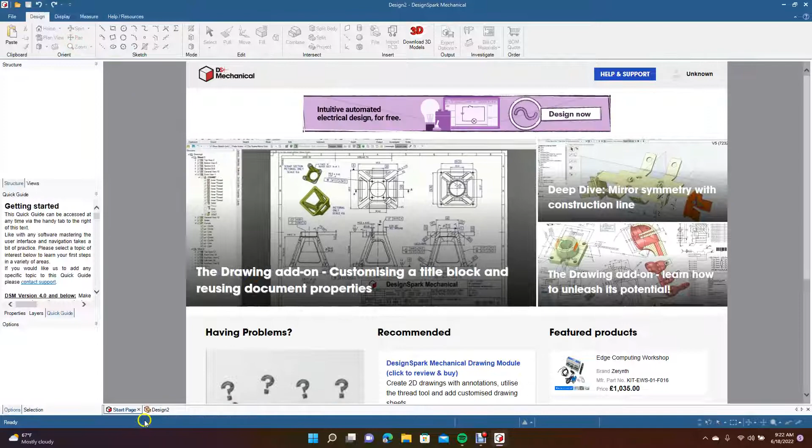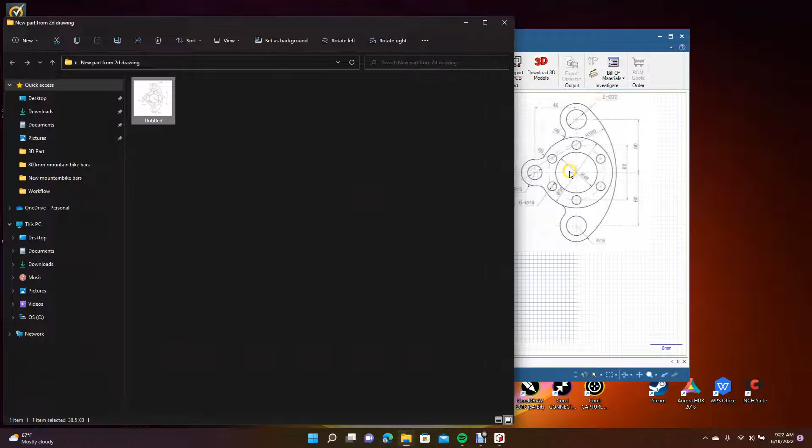Today I'm going to be doing a DesignSpark Mechanical tutorial, and we're going to be creating a 3D part from a 2D drawing. So we'll go ahead and open up DesignSpark. This particular part is in millimeters, so we'll go File, New Design, and create a plan view. We'll go up to File, DesignSpark Options, navigate to units and make sure that's in millimeters, and it looks like it is, so we'll go OK.

I found this drawing on the internet and thought it looked like an interesting part, so we're going to recreate it. We'll close that and go to full size on the file. This we're just going to use as a reference, so it just has to be big enough for us to see it. Hold down your shift key if you're going to scale something.

The first thing I'm going to do is put out some construction lines. This one here, from here to here, midpoint is 60, and then there's another 60. So we're going to do a construction line and turn on our snaps. We're going to create 120, so let's type in 120.

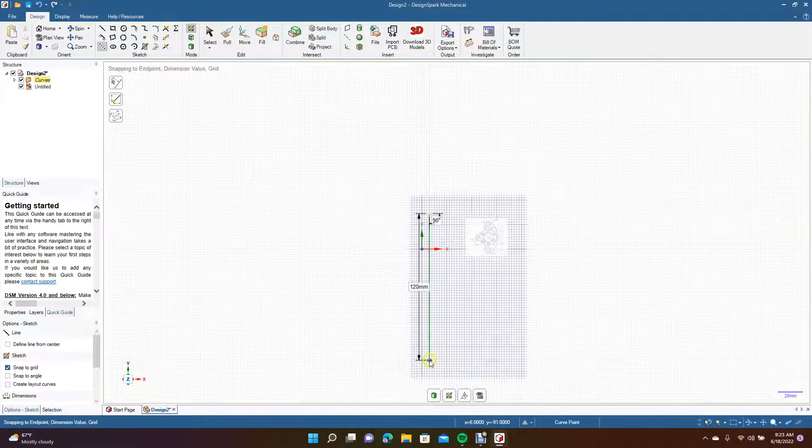Now we can blow up this 2D drawing here, this is going to be our reference. Let's go Control Plus. We're going to put in our first circle here, on the end there. It looks like 22.

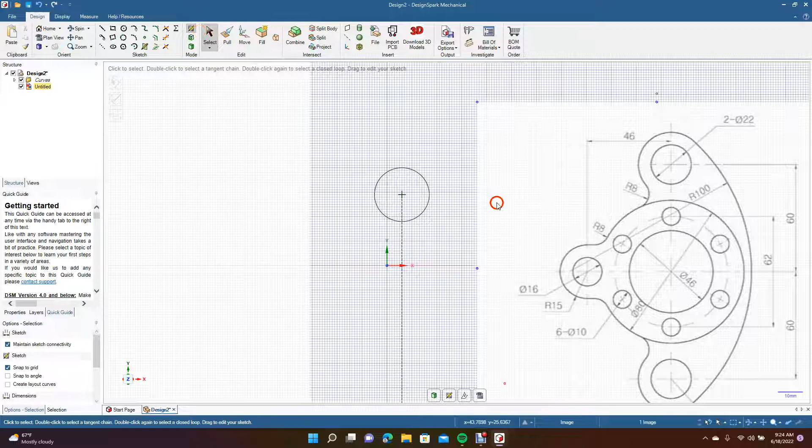Let's zoom, click on the graphic, pull that up a little bit. Looks like this is 18, so that would be, let's go here. That's going to be 10, 20, 28, it's going to be 36. So go ahead and do your second circle at 36.

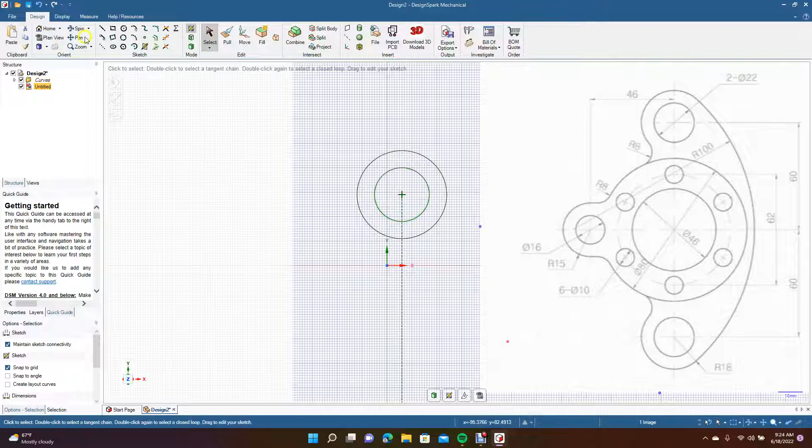So you have this one and then this one. Now you're going to pan up a little bit, Control minus. Now you're going to do the same down here with these holes, 22 and 36. Okay, now you have this hole here, and this hole down here.

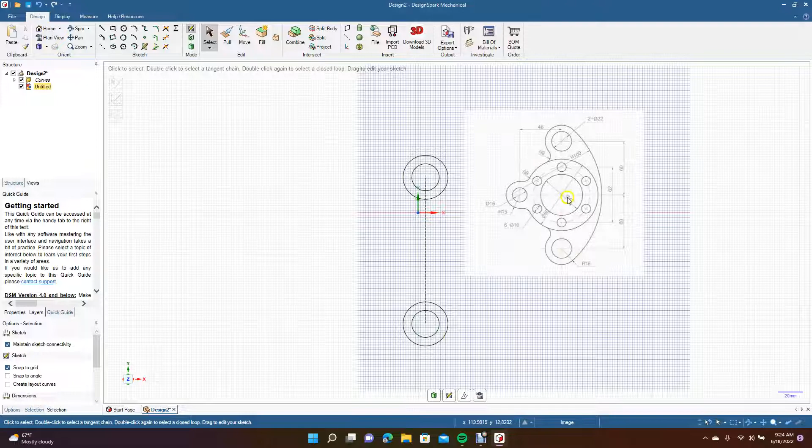Now you're going to do the mid hole in the middle here, so we'll do Control Plus, and find the center of this construction line. It looks like it's right there, make sure that it is the center. This needs to be 46, and the outer one looks like it's 80, so we'll punch in 80 there.

Okay, so now we have all this stuff here. Now we're going to do these little circles here. It looks like this is 46, this is 80. I can't really tell where the radius of this line is, it's just somewhere in the middle there, between here and here.

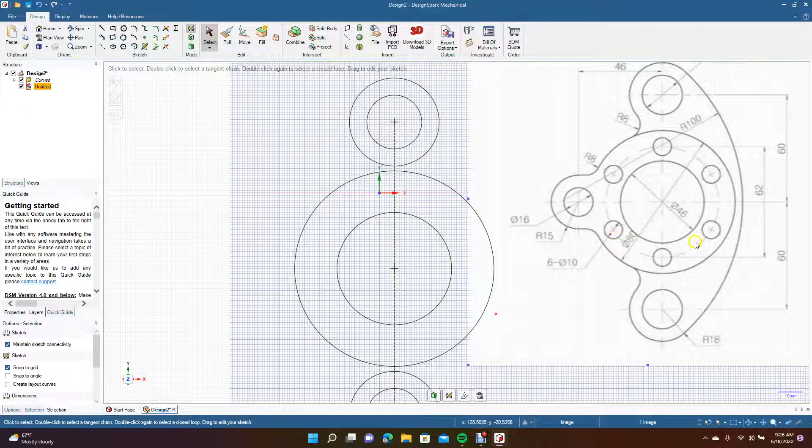Let me move this around, see if I can find that measurement. It's 46, this is 80. I don't really see that measurement at all, unless I'm looking at it and I can't see it. Well, let's just go ahead and do somewhere in the middle, so we'll click here. Somewhere in the middle is probably going to be like right there, possibly.

Okay, we'll just go 63, since it isn't identified on the drawing. I don't see it anywhere unless I'm looking right at it and missing all this. Okay, we'll just keep it that way.

We know that these circles here are 10, so let's get our circle tool out and just draw one of them at 10. Now we're going to replicate, we need a total of 6 of these. So we'll click on that circle there.

Come up to our move tool, come down here to create pattern, make sure that's checked, and we're going to drag that to the center. Then we're going to turn this, and we need, on the count, 1, 2, 3, 4, 5, 6. We need 6 of these, so let's go 6.

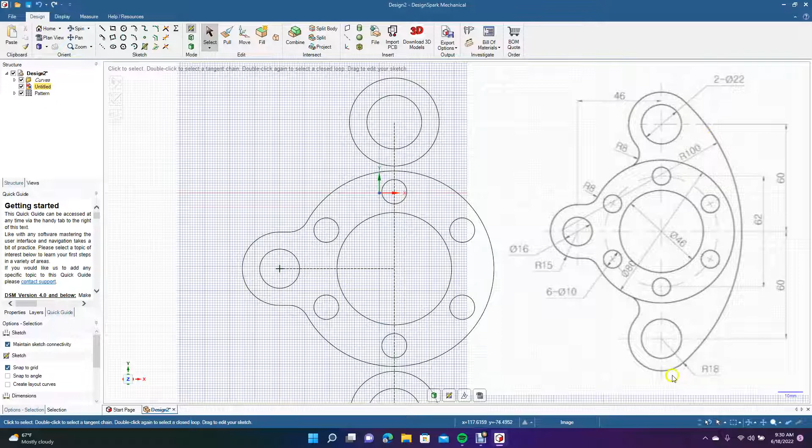Now let's pan this down. We have a 100 millimeter radius going from here to here, I think that says 100. Alright, so let's minimize this.

Let's get our tangent arc, I'm going to go from here over to here. Just click there. Now you're going to select, click on the line there, now you're going to drag this out.

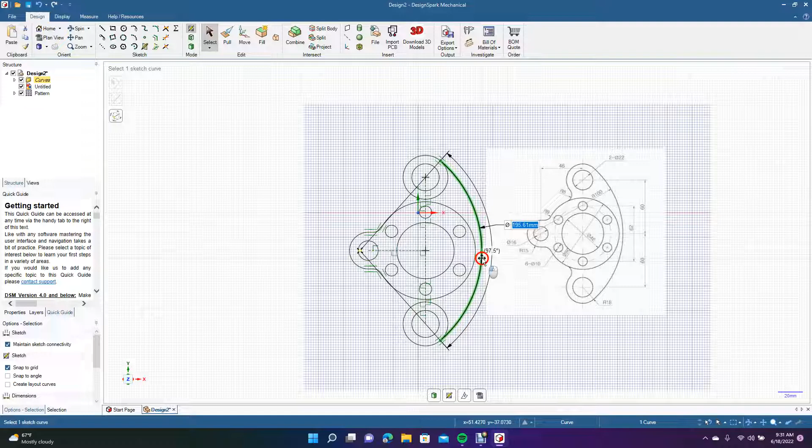It can't be that far. 200 — this is R100, but it's a 200. So that's going to be that piece there. Okay, and we got this here.

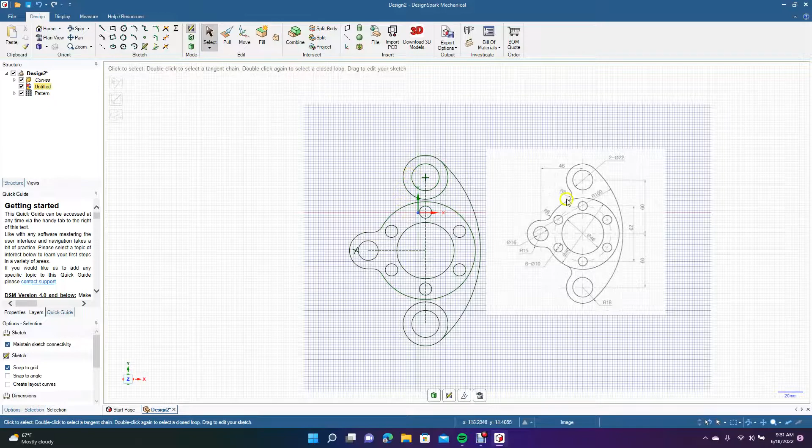Now you need to put in a radius here. So let's go Control plus. This is R8 right here. So we're going to get this tangent arc, going from here to the tangent spot.

Not really finding one. Oh, there's one right there. Okay, click there. Now let's go ahead and get our selection tool, click on that, and let's kind of move this down to...

Can't really be 8, that's pretty tight. I think it's more like 16. Let's go 16. Okay, that's good there.

Alright, so this is this here. Alright, let's pan up. We're going to put another one down there, 16. So go.

Okay, so we're going to go get our tangent arc again, and we're going to go from here, click to there, select, and then we're going to click and drag. And then we need to type in 16, enter. Okay, that looks good. Save this one here.

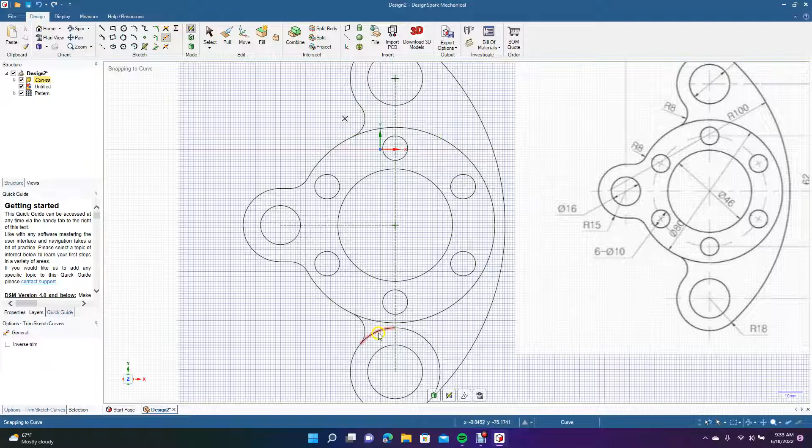Alright, so it looks like you have the part. Let's go ahead and Control minus. Alright, so you have this round part here, you have this disc here, you have these little small ones.

Now we just have to go give this some 3D depth. What you can do is, if you want to really check this, just blow this up until it's close to the size, and then come in here and check it. It looks like we're right on the money.

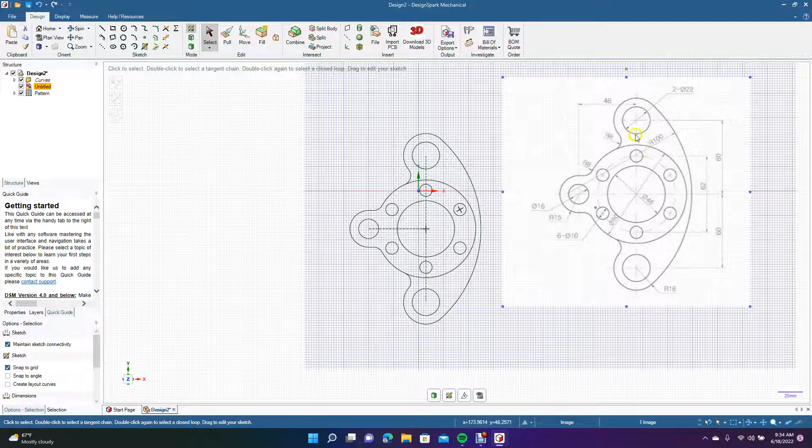Okay, that's normally what I do — I keep this up here, and normally if I'm creating something that's going from a two-dimensional drawing to a 3D part, I work with 2 monitors. On the right hand side I'll keep the drawing with the dimensions, and on the left hand monitor I'll keep my DesignSpark part.

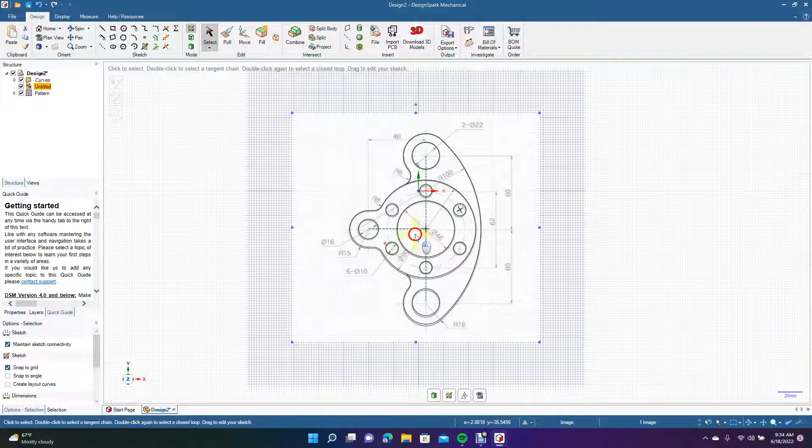So this is normally just for my reference, to make sure I did everything correct. Looks like I did. Then we'll go ahead and delete that. Now we can start adding some 3D depth to this drawing, and we'll go ahead and get rid of these construction lines.

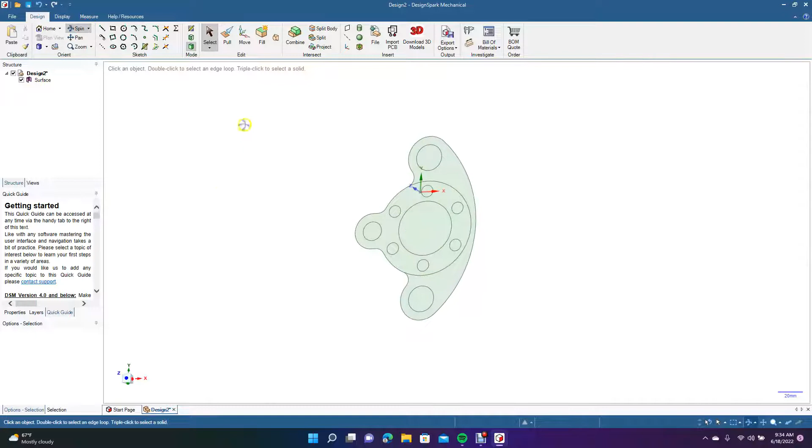They served their purpose. Then we'll go ahead and spin this. I'm going to give this a little bit of depth on this plate, bottom plate here. So we'll drag this down — I think 15 millimeters is sufficient. So we'll go 15. And then I'm going to go ahead and drag this part up, so we'll pull.

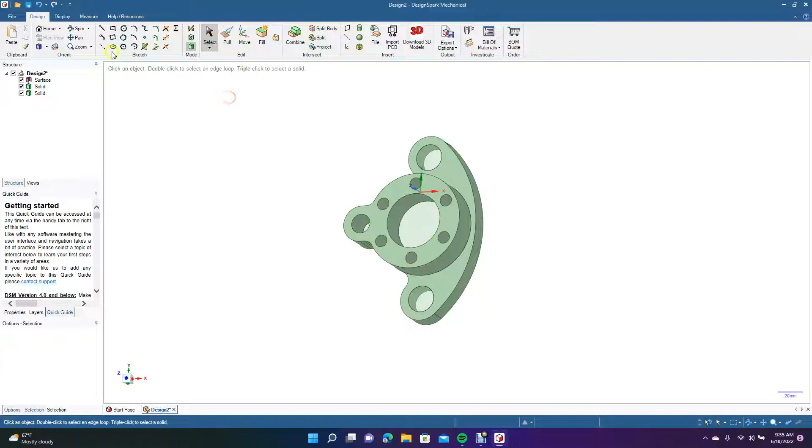Maybe give that 24. That's good. Okay, so let's see. Now what we want to decide here is we've got to do that bottom part too. So go ahead and click on the bottom part, and we'll pull up to this face.

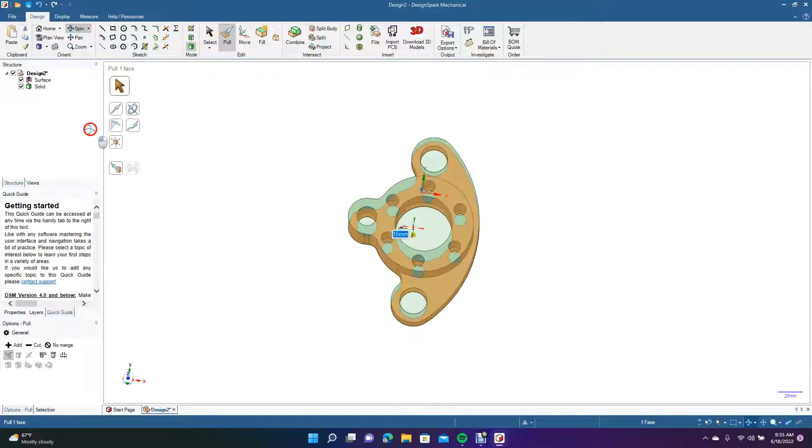Okay, now we'll go ahead and spin this. Not sure if I want the holes to go all the way through. I think the holes going all the way through is fine. So we'll go ahead and get rid of these — don't need these.

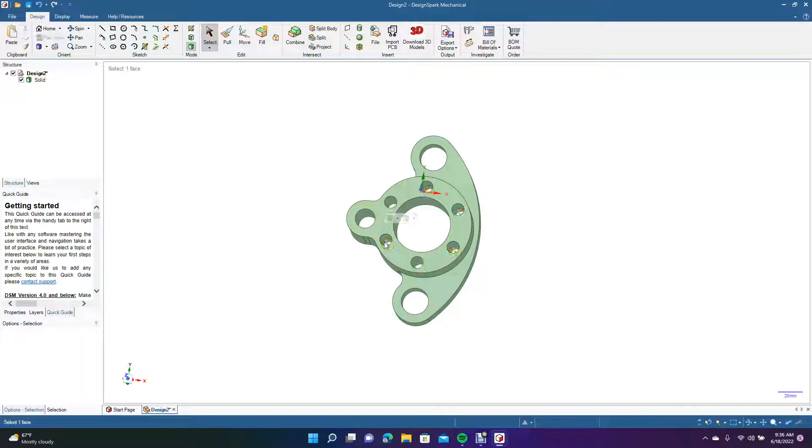And then we'll get these ones on the inside here too. We might have to zoom in a little closer to get these. Hold down the control key. If you can get all of them, great — if not, we'll zoom in. Okay, hit delete. Now we'll Control S.

Now let's put in our fine details, and we'll be done with this tutorial. Alright, first thing I'm going to do is go ahead and click till all that is selected. And then we're going to go ahead and pull a radius on this, a fillet — I'm thinking 1.5 would be good. We'll do that, 1.5. Okay, now click till everything is selected here.

And then go to pull — we're going to go 1.5 there as well. Okay, now let's spin this. I think I'm going to leave the bottom flat like that. And then we'll go ahead and get this, type 1.5.

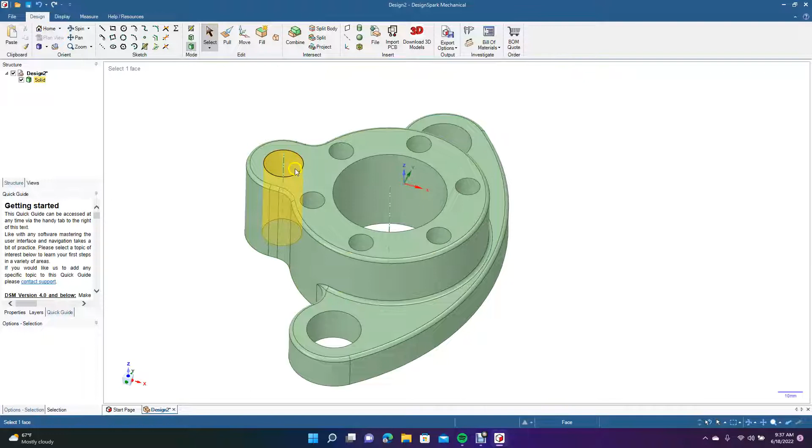Okay, and then I'm going to go and get all of these, and we're going to put a fillet on these, and that will be the end of the tutorial. That will be all our detail work that I want to do to this part.

And I'm not going to put 1.5 — we'll just go to pull. We're going to type a 1 millimeter fillet in there. And then we're going to do these — hold down Control key, go to pull, type 1 millimeter in there. And then we'll put a 1 millimeter fillet in that bigger diameter circle.

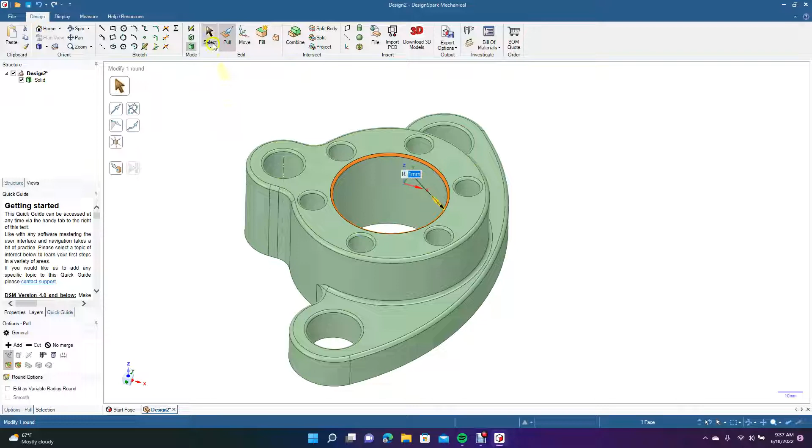Okay, that's going to do it here. So we'll go ahead and spin this, make sure the part looks good. It does. We'll go ahead and go to the isometric view. Spin that a little bit. Okay, that's going to end today's tutorial.